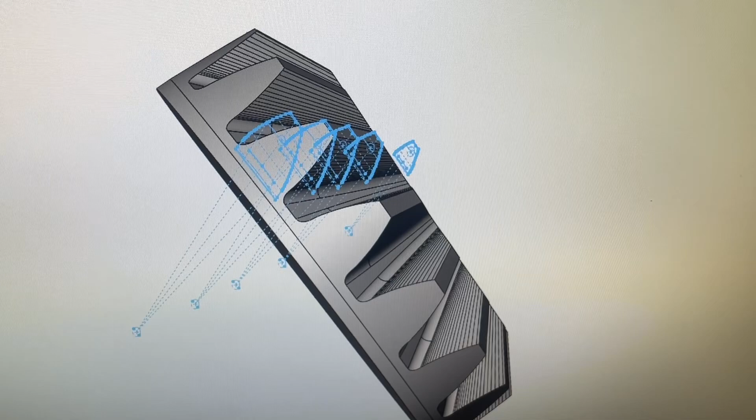The June issue of Gear Technology magazine shows someone's process to develop a solid model from a scanned gear. And I've been doing that for a long time and thought I'd kind of show you what I do if anybody's interested. I take the gear data from the Coniflex gear data supplied by the customer and create my model, and then correct

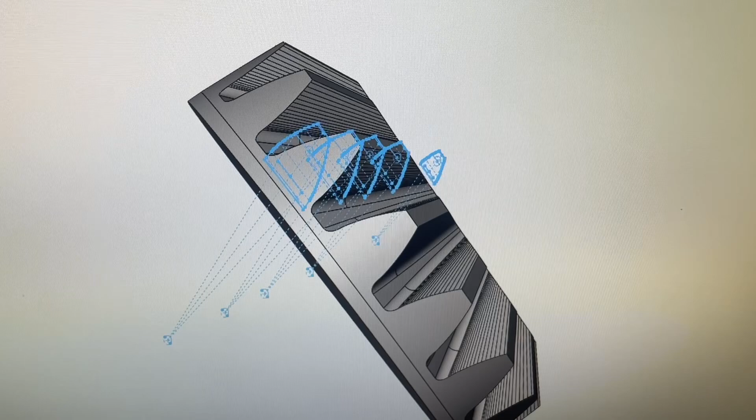using a CMM the model to the customer supplied sample. I have to have a supplied sample. I could get away without the gear data because you can, through educated guess, come up with gear data.

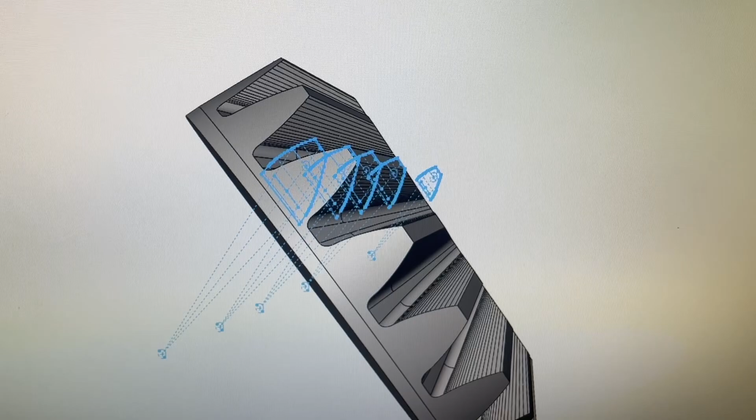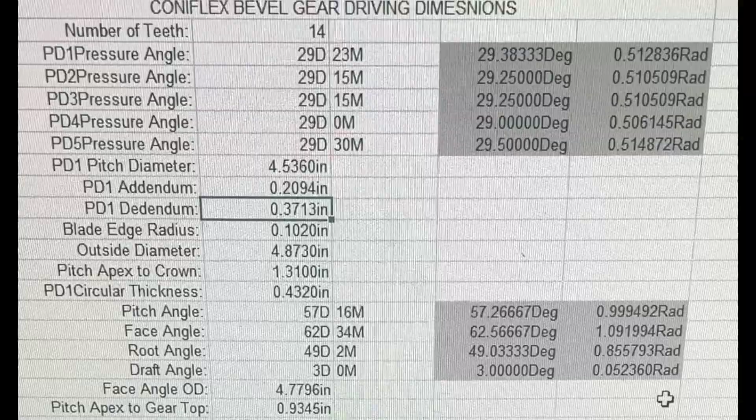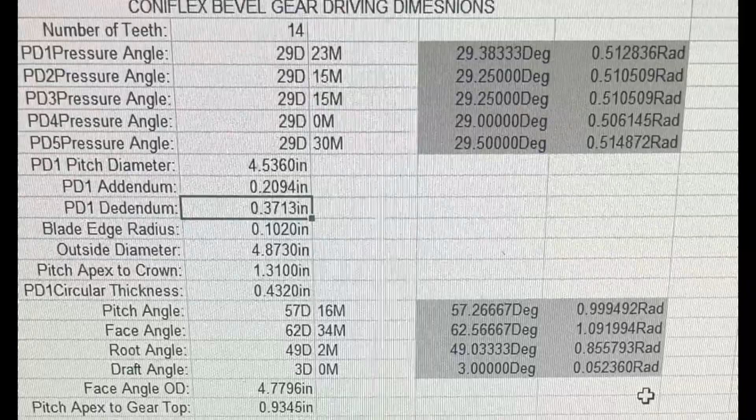But I'm going to go through how we do it, and anybody interested can look at the June 2025 Gear Technology magazine and see how it's done there. In the magazine article, they start with a scanned gear and develop their tooth profiles from the scanned model. We start with the Coniflex gear data dimensions supplied by the customer, and once you enter this, I'll show you, but you instantly get a gear, and we go on from there.

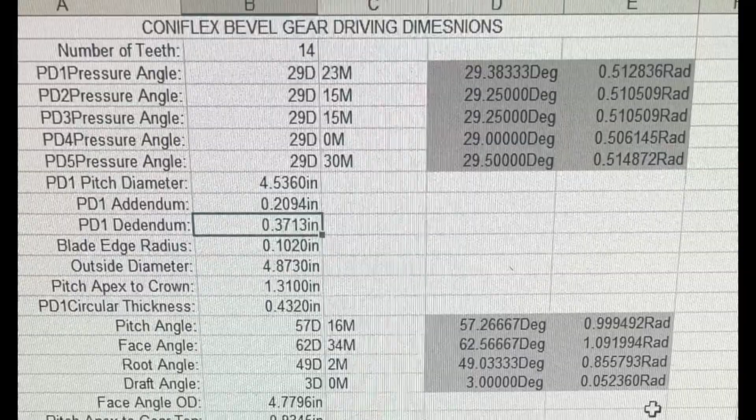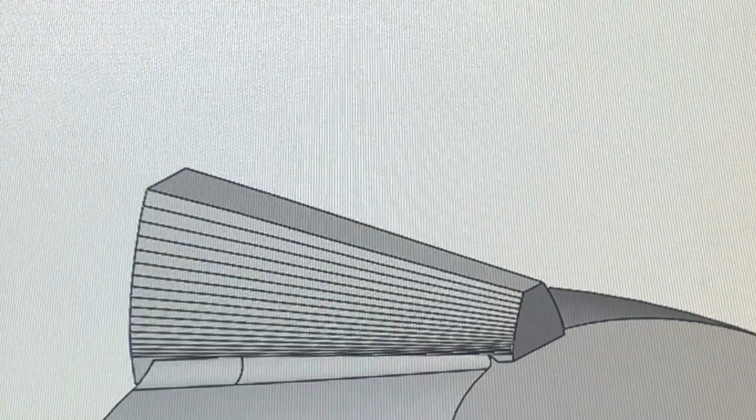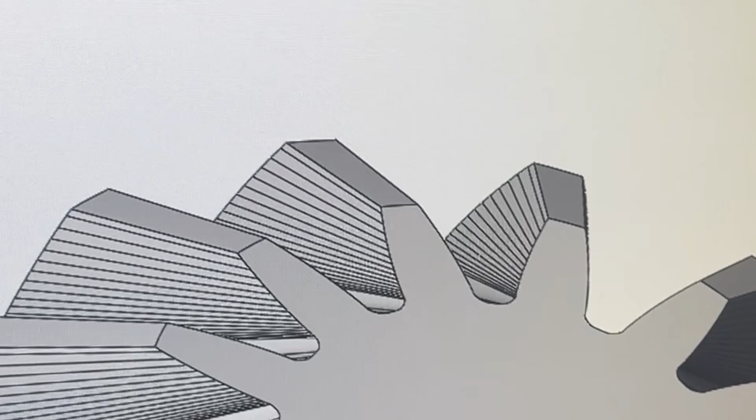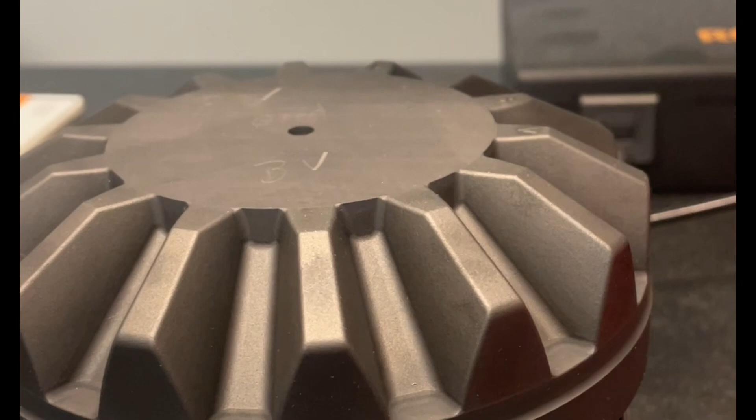If there's a part print, then that'll give you all this, and the draft angle on the outside, and there's the finished gear. This machine is used for our gear development, and we also can confirm using Gear Pro on our Zeiss.

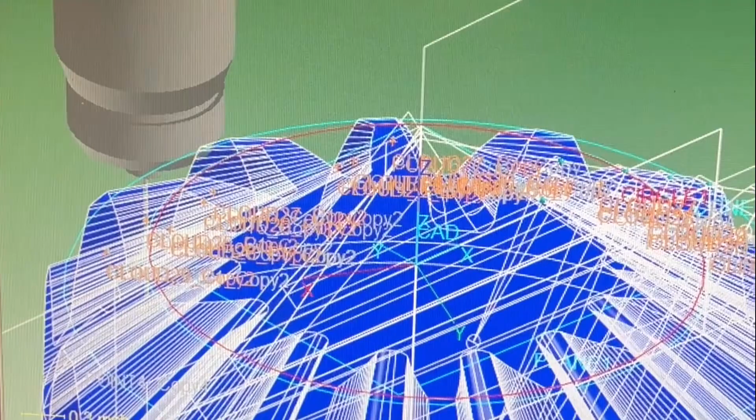The machine goes through a program to center the part off of the model. We manually set it up and get it started. This is CMM Manager, and that's what we have always used for our gear development. Like I say, we've got a Zeiss that we use for verifying finished parts. This works real well.

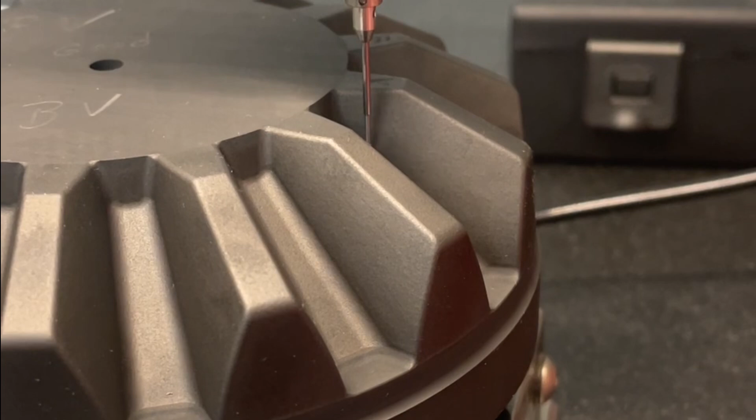Once the part is set up and verified, we scan the surface just on the gear profiles. We have X, Y, Z calculated coordinates for each one of these points. We move the CMM to the X, Z coordinate, and then inspect to the Y, and then directly take any error that's in the CMM inspection report to modify the gear data.

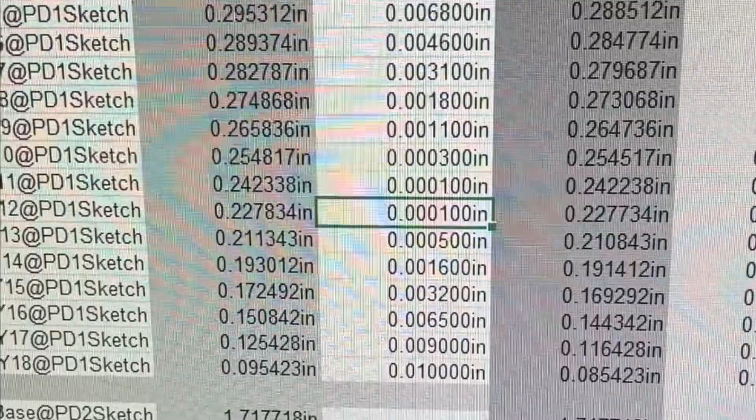Once we have the CMM verified points, we go back to the gear data sheet and insert corrections at various points directly off of that. Usually we'll go over it 2 or 3 times, and we only use one flank of one tooth because the cut gears are as accurate as our computer models.

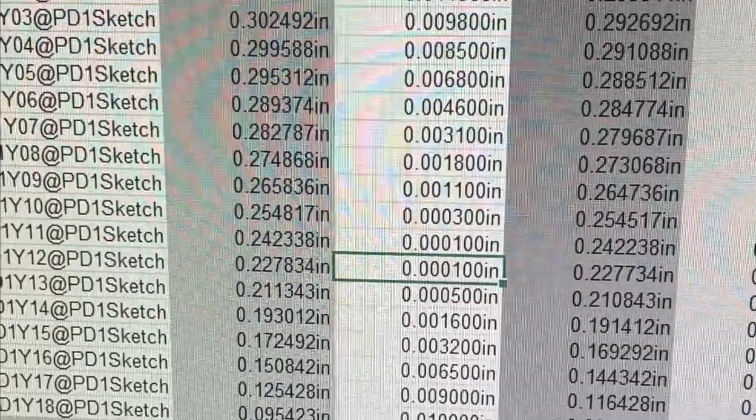And once we get this verified, we take that one tooth and inspect random points outside the calculated points, and we can move those to bring them into our tolerance, and we have a gear once we do this.

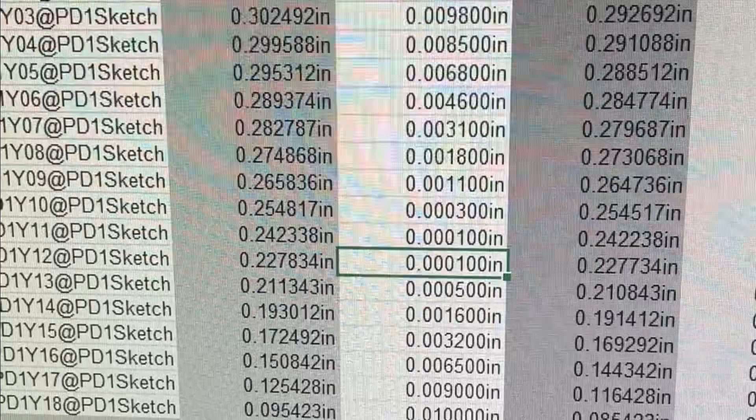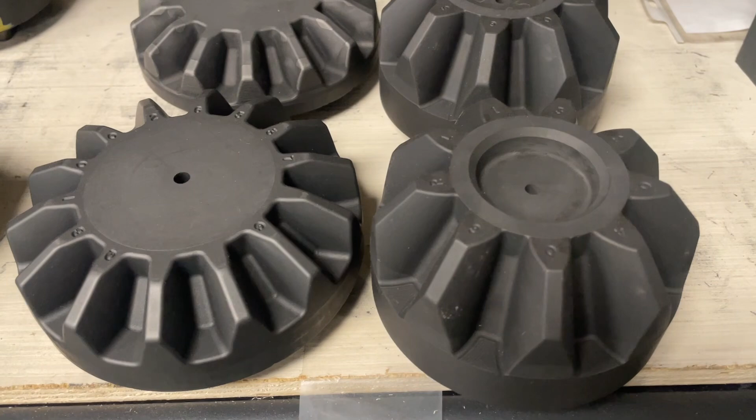It's a couple times. These are some of the parts we've done, from the largest part that we ever did to the smallest. Contact patterns rolled on these, and they are normally what we look for. These are a few of the electrodes that we've made over the years and made dies for.